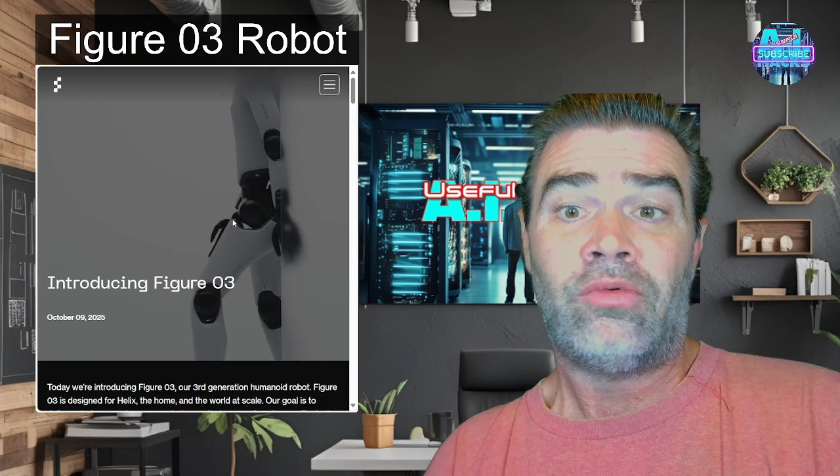From dishes, kitchens, factories, this robot isn't just a machine, it's a partner designed to free your time, transform your day, and redefine what it means to be a human in an AI-driven future. A brand new Figure 3 robot enhances your life.

It features feather-light hands and tactile sensors, along with palm-mounted cameras, allowing it to manipulate anything from towels to delicate glassware with human-like skill. Its battery, safety features, and wireless charging make it ideal for home use, and it was just tested in Northern California.

While its AI-driven system, Helix, gives it the ability to learn and act with real reasoning power. Engineered for mass deployment, with production lines ready to bring humanoid robots to everyday environments, from homes to supermarkets and manufacturing floors.

Robots like Figure 3, Tesla's Optimus, and Boston Dynamics Atlas are helping solve labor shortages, automate industrial tasks, and make dangerous jobs much safer for humans. You see, real-world tasks, with each upgrade of the Figure 3, it moves closer into being a true general-purpose robot.

It can fold clothes, load dishes, and even respond to spoken commands thanks to the powerful AI models. Imagine a trusted assistant at home, ready to help with your chores, giving families the precious time to spend with their loved ones.

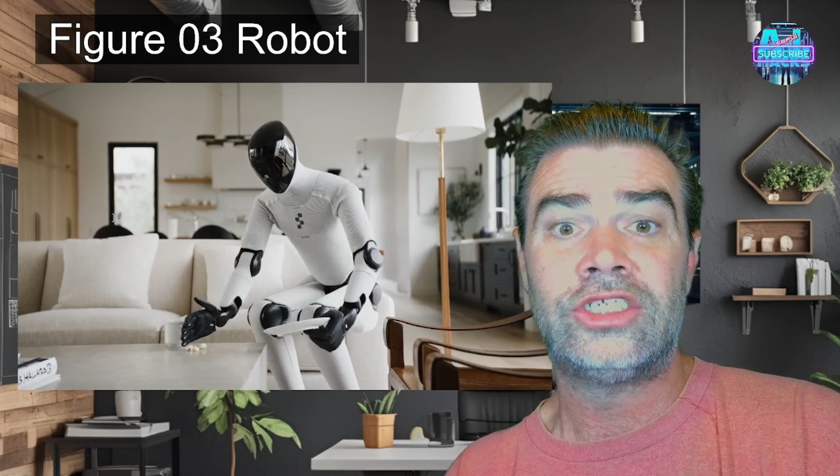The broad impact and the ethics that have to do with this, as robots take on critical roles in healthcare, construction, and logistics, we must also consider ethical deployment. In fact, that's going to be our next story coming right up.

But the workforce, it's transitioning, and the promise of greater human-robot collaboration is right on point, with the market aiming for millions of humanoid robots in less than 10 years by the year 2035. The world is entering a new age of productivity and inclusivity.

You see, the thing is this Figure 3 robot, it isn't just a robot. It's proof that future AI helpers are here to stay. Imagine what you could do with more free time and a partner powered by cutting-edge technology, ready to help whenever you need it.

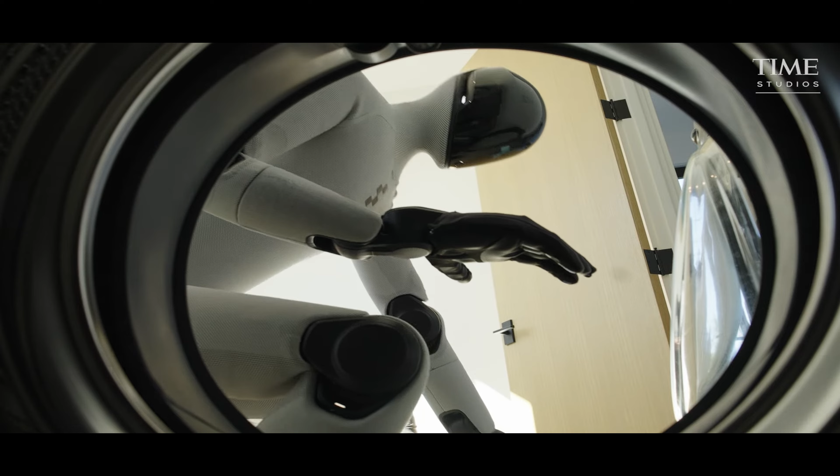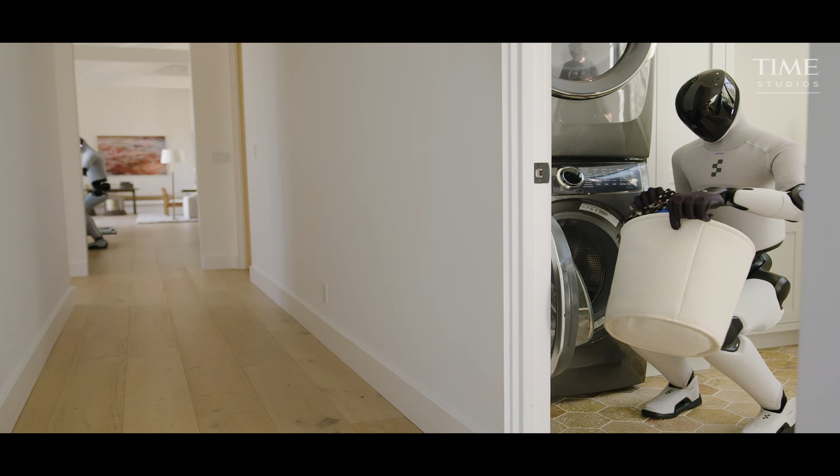General robotics, it seems, is still a long way from becoming a reality. So there were occasions where I was watching the robot folding towels and loading a washer. And it's kind of clear that it can do those things pretty well, but there were times when one of the towels dropped out of the washer and it was unable to pick it up.

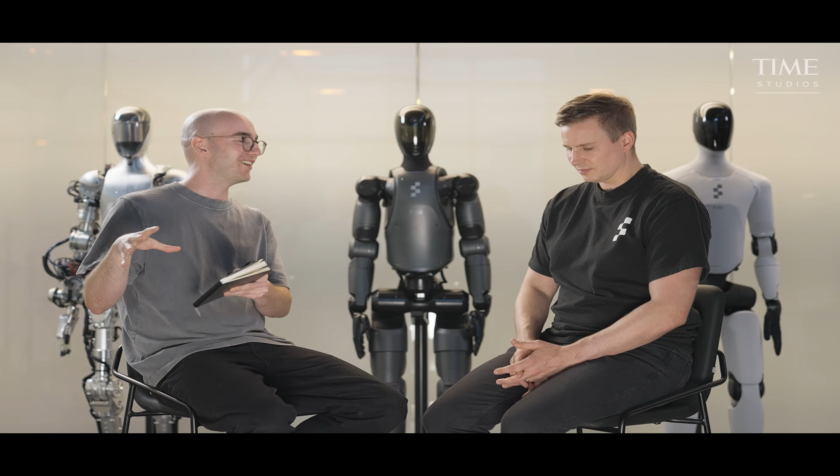So how do you get from there to your vision of a general robotic overlord that can do anything you want it to? Yeah, overlord, nice. I think the short answer is we feel like data fixes almost all this at this point. And we've seen that in almost all the demonstrations we do, where even in the early stages, we would say towel folding or the logistics use case, it just wasn't that great. It made a bunch of mistakes.

As we added more data, it got faster. It made fewer mistakes. Still had some mistakes there, and all that is asymptotically approaching zero. It's getting close to human levels in terms of we can run them for hours and hours, and it just performs really well.

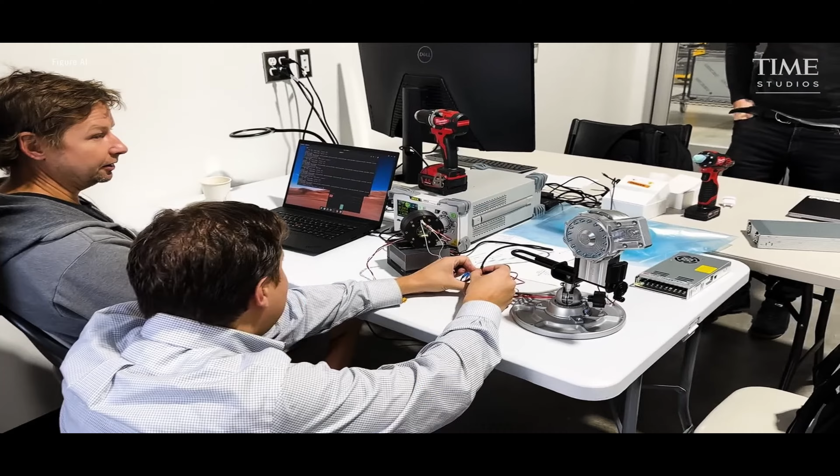Large language models, like ChatGPT, prove that if you scale up the amount of data and computing power used to train a neural network, it would gain surprising new capabilities across the board. Figure is one of a group of companies attempting to apply that insight to robotics.

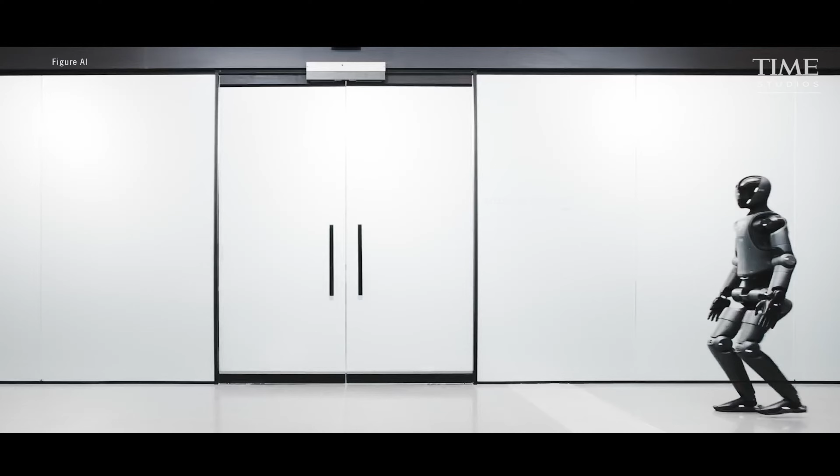The company is spending big to collect video data of humans performing tasks, like folding clothes and cleaning homes, in a bid to teach robots to do the same thing. The big question is, will it work? The company says early experiments have already yielded promising results.

Some of the last generation of robot, the Figure 2, are already working in a BMW factory in South Carolina, moving parts that ultimately make it into the BMW X3.

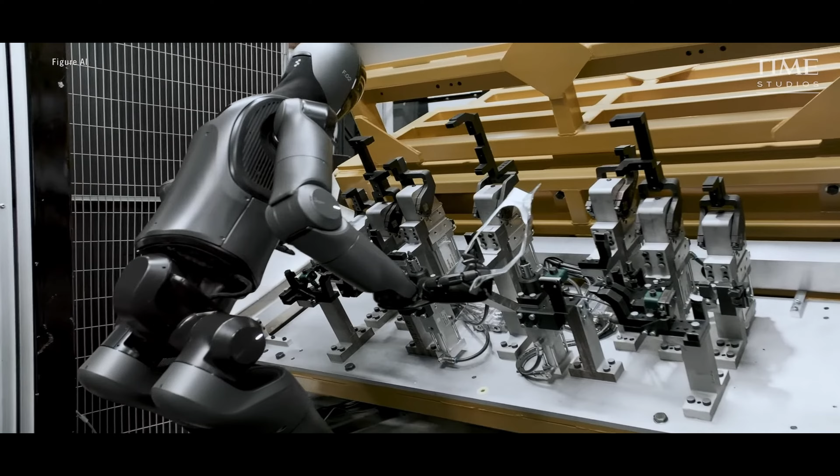One of our core focuses in the roadmap here is how do we ship robots into basically every consumer home in the world. We want to do what we do all day in the home, just things I hate. I don't want to do laundry, I don't want to do dishes, I don't want to clean up the house. And we haven't really had any large breakthroughs in the home in terms of automation for decades.

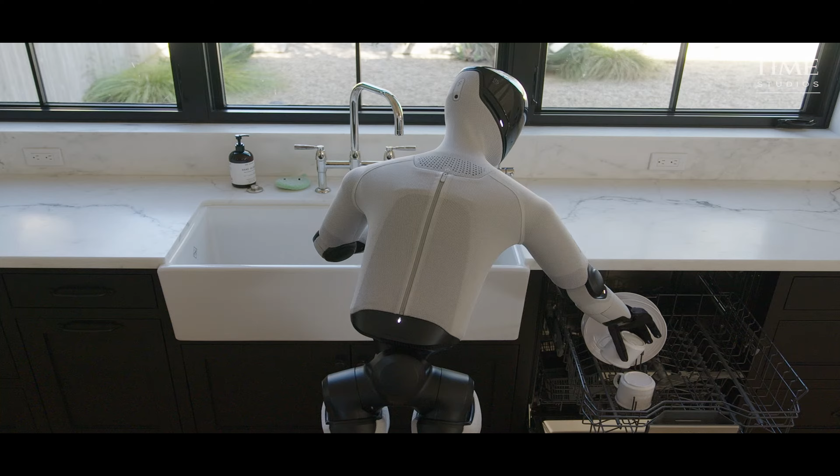So our view is that the robot will not only act as your companion in your home, being able to share very deep memory and basically talk to you just with speech, and then ultimately be able to do everything you do in the home that you don't want to do.

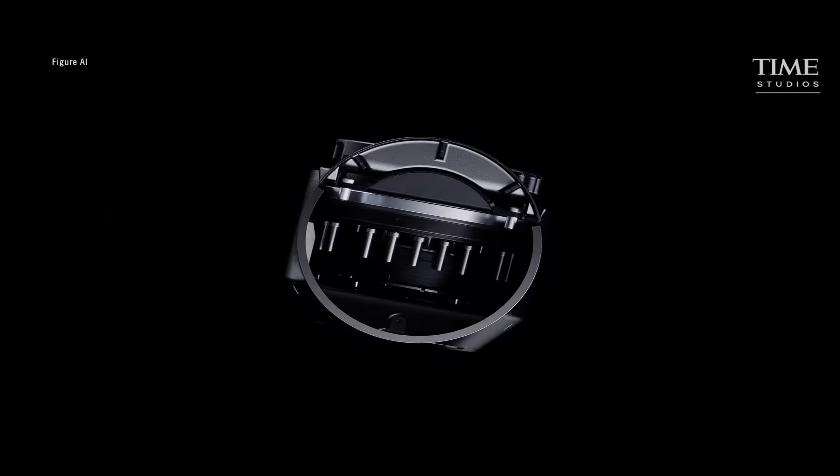But upon its launch this October, the Figure 3 won't be ready for your home. Not only is the robot not yet useful enough to be an Android butler, but Figure says it also has many unsolved safety challenges. Large language models are notorious for sometimes going off the rails, and that controllability problem will extend to the systems that power humanoid robots too. There's also the problem of ensuring that the robot doesn't fall over, cause property damage, or injure its human cohabitants.

Getting the robot to be extremely safe in the home long term is a really hard problem. I would say now we're tracking almost 15 different areas for safety. There's a physical safety thing, the system safety engineering needs to be done really well. There's cybersecurity that we need to do really well. How do we do encryption at scale?

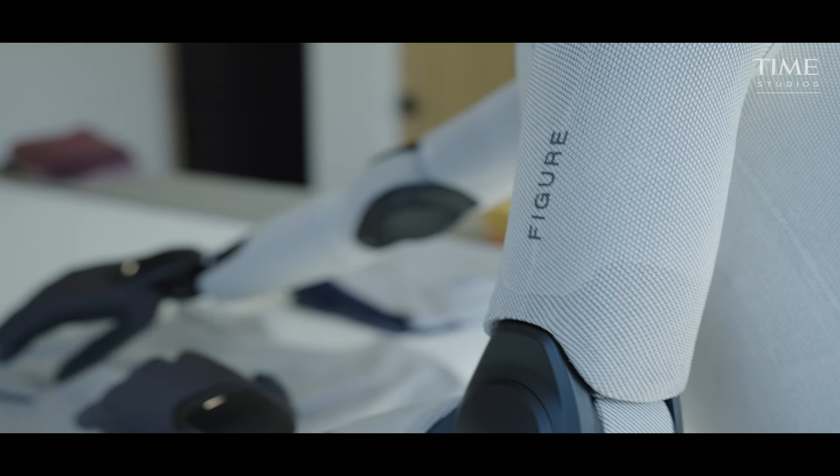We have a safety lead here that previously worked on mobile robotics. We have a cybersecurity lead that came from one of the top groups in cybersecurity here in the US. They each have teams, and we're trying to spend a large focus on figuring out how do we enter first, which will be US homes, and then global, in a safe way, and do high performance work.

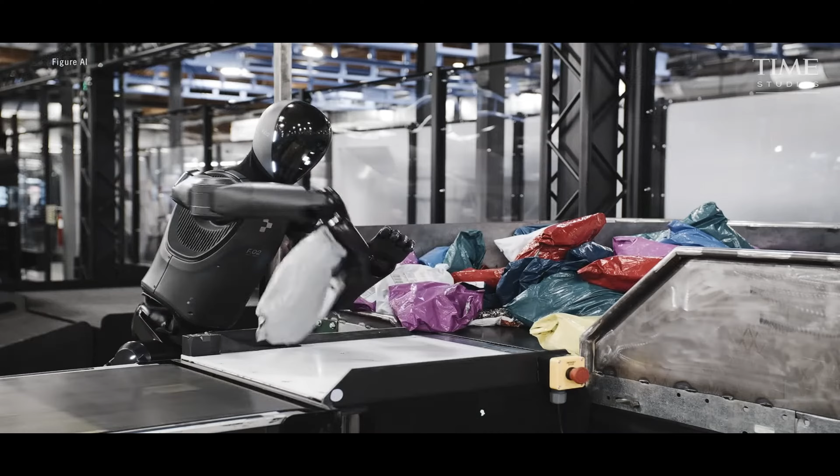If there's even a small chance that this audacious company can succeed in its goal, the implications would be world-changing. With the global population expected to peak this century before heading into decline, the arrival of robots might allow the world economy to continue growing, even as human labour becomes less abundant. Thanks to robots, the cost of goods and services might plummet, potentially enabling an increased quality of life for all.

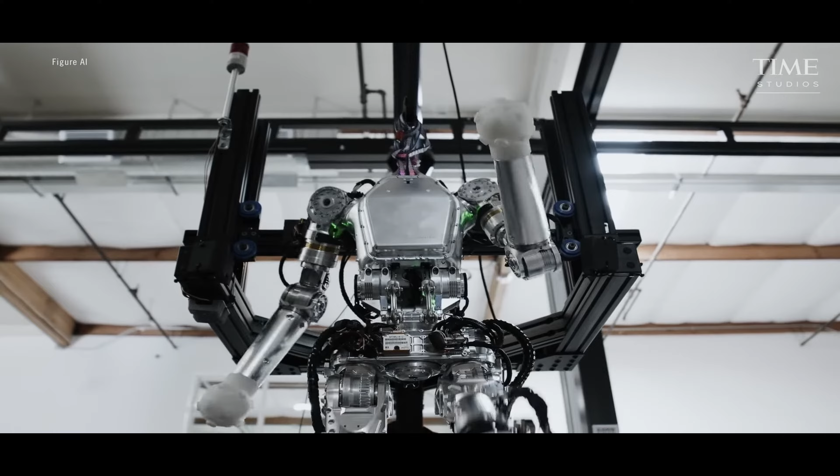But liberating humans from work would also mean liberating them from their paychecks. Robots would do the same for manual labour as cloud-based AI threatens to do for office work, creating a joblessness crisis that Adcock says should be addressed with some form of universal basic income. At the same time, though, this billionaire entrepreneur is already calculating how to win control of what he expects to be a $40 trillion industry, and one that tends towards monopoly.

You're making a synthetic human. Right. That's really cheap. It works 7 days a week, 20 to 24 hours a day, and just wants to keep working and learning. How many cheap humans, synthetic humans, could you sell in the world to do stuff? I mean, I think billions in the workforce for sure. I think every human would want one, so you have close to 10 billion there.

I do feel there'll be a point, probably in the Bay Area first, where you walk out and you see more humanoids than humans. Yeah, it's gonna be here, right? And that'll feel crazy. I grew up reading a bunch of crazy sci-fi and dreaming of this, but I think it'll be amazing to have humanoids out and about, and you can talk to it like a human. It can basically do things for you. It's a companion, knows you better than maybe anybody else. So I'm really looking forward to it.

We're not designing the robots to harm humans or weaponize things like this. We're designing them to do really useful work for humanity.

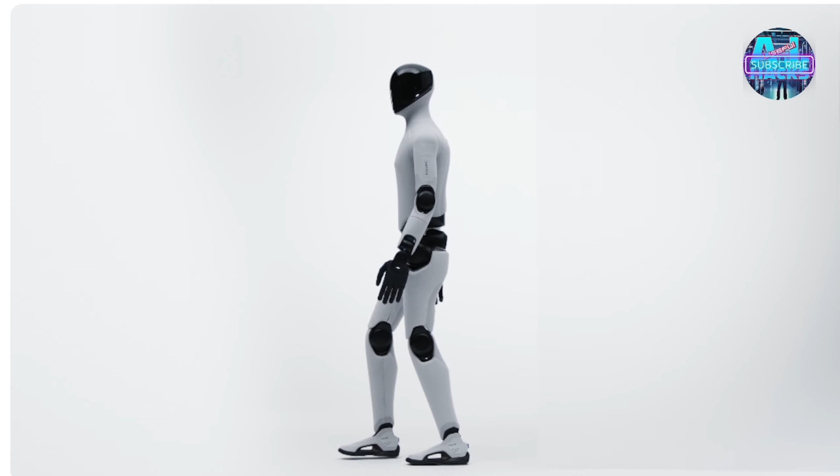So, as you can see, they just introduced Figure 3 today, October 9th, 2025. They say: today we're introducing Figure 3, our third generation humanoid robot. Figure 3 is designed for Helix, the home, and the world at scale. Our goal is to deliver a truly general purpose robot, one that can perform human-like tasks and learn directly from people.

To realize this vision, our engineering and design teams completed a ground-up hardware and software redesign to ship Figure 3. For Helix, Figure 3 features a completely redesigned sensory suite and hand system which is purpose-built to enable Helix, Figure's proprietary vision language action AI. For the home, Figure 3 has several new features, including soft goods, wireless charging, improved audio system for voice reasoning, and battery safety enhancements that make it safer and easier to use in a home environment.

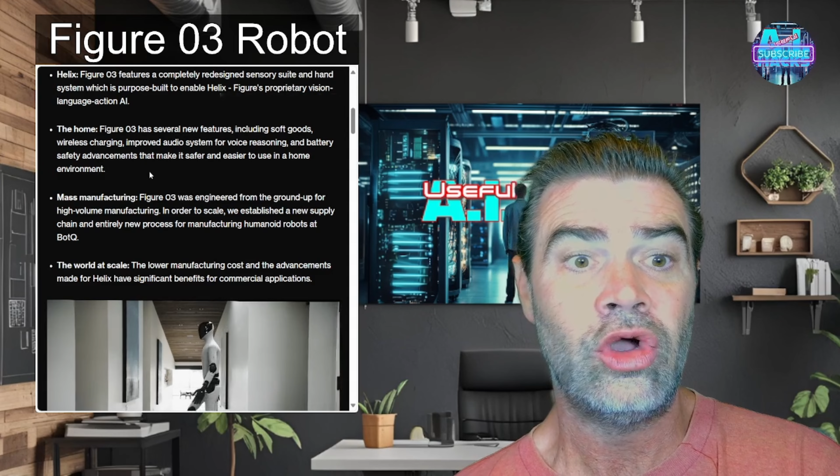For mass manufacturing, the Figure 3 was engineered from the ground up for high volume manufacturing. In order to scale, they established a new supply chain, an entirely new process for manufacturing humanoid robots at BotQ. The lower manufacturing cost and the advancements made for Helix have significant benefits and ready for commercial applications. Here they are testing it in Northern California.

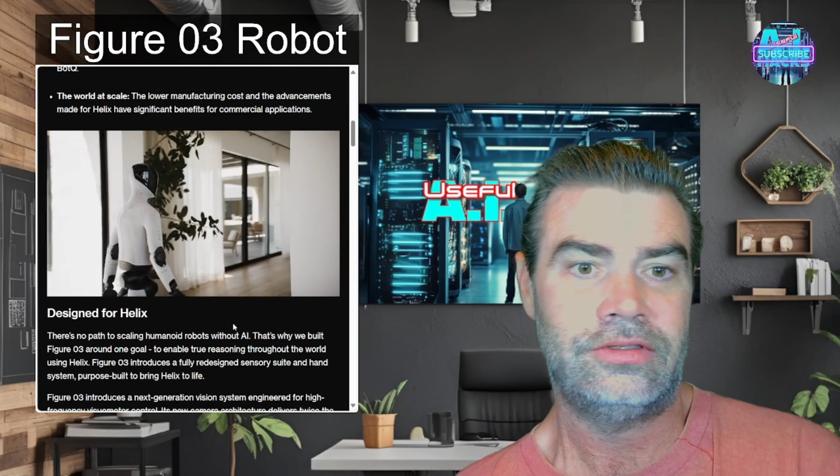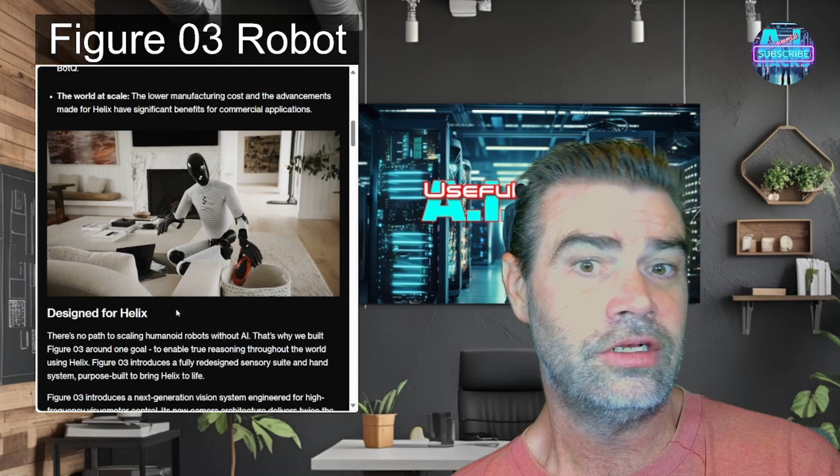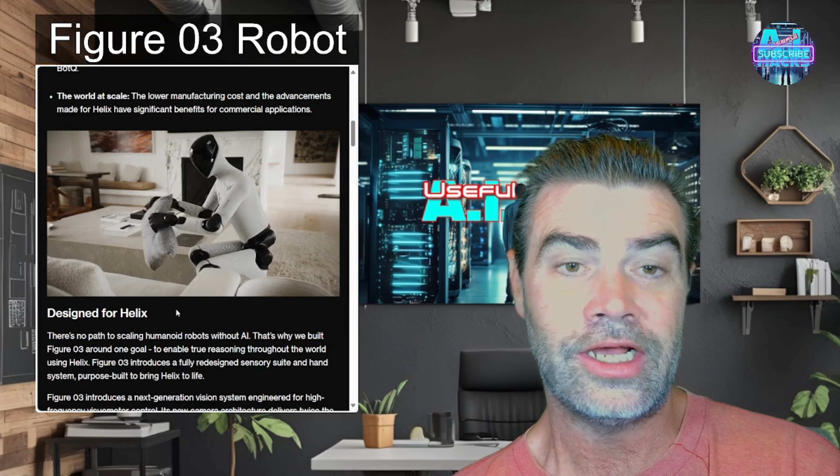Look at that. It walks just like normal. Can you imagine? You might have one of those in your household in the next few years. Prices on all this are going to come down. And, hey, are you going to have to ask your kids to put away their toys? Or maybe you might want the Helix to help you with putting away your computer systems or setting it up for you so you can start doing your work, cleaning house, you name it. It's going to be saving time so that you can spend time with your loved ones and friends and family.

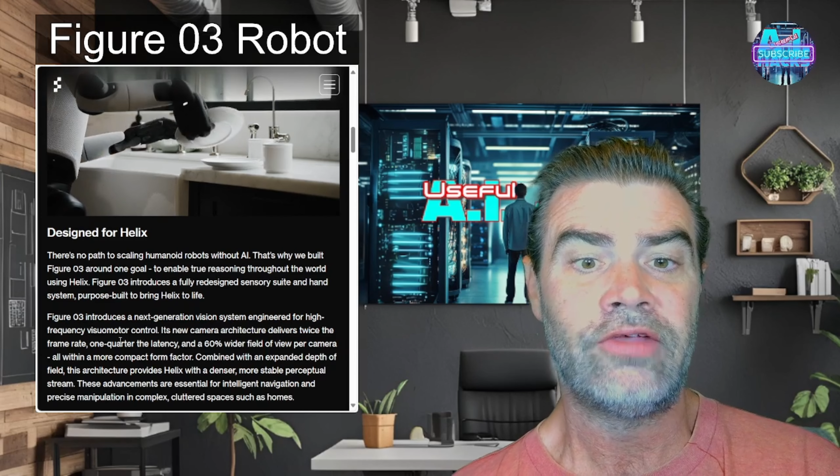There's no path to scaling humanoid robots without AI. That's why they built Figure 3 around one goal: to enable true reasoning throughout the world using Helix. Figure 3 introduces a fully redesigned sensory suite and hand system purpose-built to bring Helix to life. Figure 3 introduces the next generation vision system engineered for high-frequency visuomotor control. Its new camera architecture delivers twice the frame rate, 1/4 of the latency, and 60% wider field of view per camera, all within a more compact form factor.

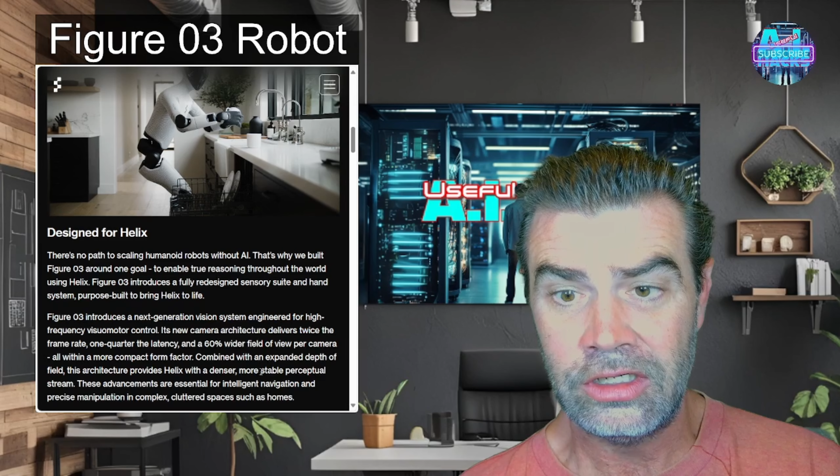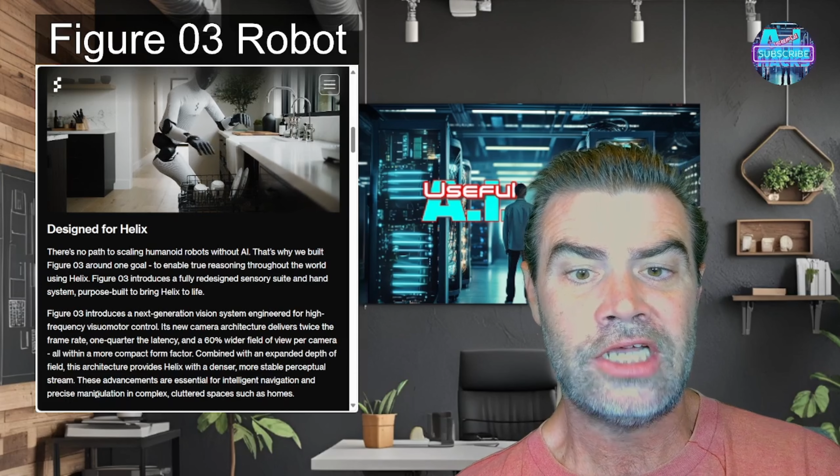Combined with an expanded depth of field, this architecture provides Helix with a deeper, denser, more stable perceptual stream. These advancements are essential for integrating intelligent navigation and precise manipulation in complex, cluttered spaces such as homes. Tired of doing laundry? Have the Helix do it for you.

Each hand now integrates an embedded palm camera with a wide field of view and low latency sensing, which offers redundant, close-range visual feedback during grasps. These cameras allow Helix to maintain visual awareness even when the main cameras are occluded. As an example, when reaching out into a cabinet or working in a confined space, it enables continuous adaptive control in real time. So you don't have to fold your laundry anymore. Have the Helix do it for you.

Figure 3 hands represent a major leap in compliant and tactile design. Softer, more adaptive fingertips increase surface contact area, enabling more stable grasps across objects of varied shapes and sizes. After surveying existing market options, Figure found that current tactile sensors had inherent limitations that could not withstand real-world use. This led them to an internal development process of their first-generation tactile sensor, guided by 3 principles: extreme durability, long-term reliability, and high-fidelity sensing. Each finger sensor can detect forces as small as 3 grams of pressure, sensitive enough to register the weight of a paper clip resting on your finger.

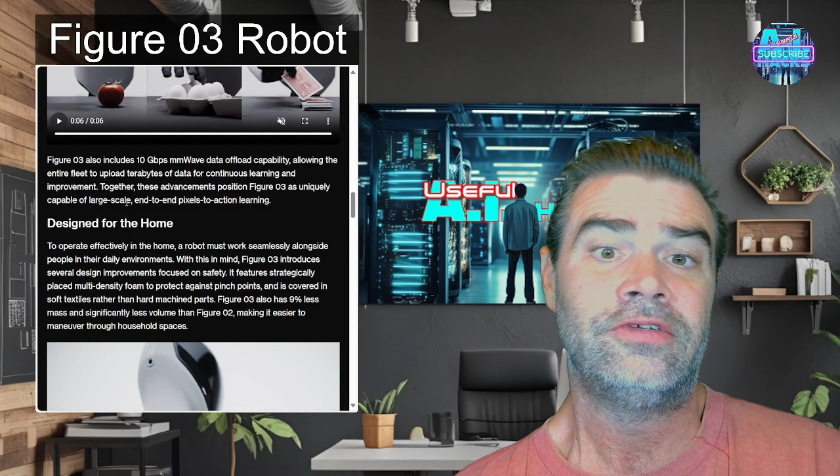Figure 3 also includes 10 gigabits per second mmWave data offloading capacity, allowing the entire fleet to upload terabytes of data for continuous learning and improvement. Together, these advancements position Figure 3 as uniquely capable of large-scale end-to-end pixel-to-action learning. Designed for the home: to operate effectively in the home, robots must work seamlessly alongside people in their daily environments. With this in mind, Figure 3 introduces several design improvements focused on safety.

It features strategically placed multi-density foam to protect against pinch points, and is covered in soft textiles, rather than hard machined parts. Figure 3 also has 9% less mass and significantly less volume than Figure 2, making it easier to maneuver through household spaces. The Figure 3 battery pushes the bounds for robot battery safety and incorporates multiple layers of protection against abuse and malfunction, introducing safeguards at the battery management system, cell, interconnect, and pack levels. The battery has already achieved certification to the UN 38.3 standard.

Beyond safety, Figure 3 is designed for everyday usability. The soft goods are fully washable and can be removed and replaced without tools, allowing quick and easy swaps. The robot can also be customized with various clothing options, including garments made from cut-resistant and durable materials.

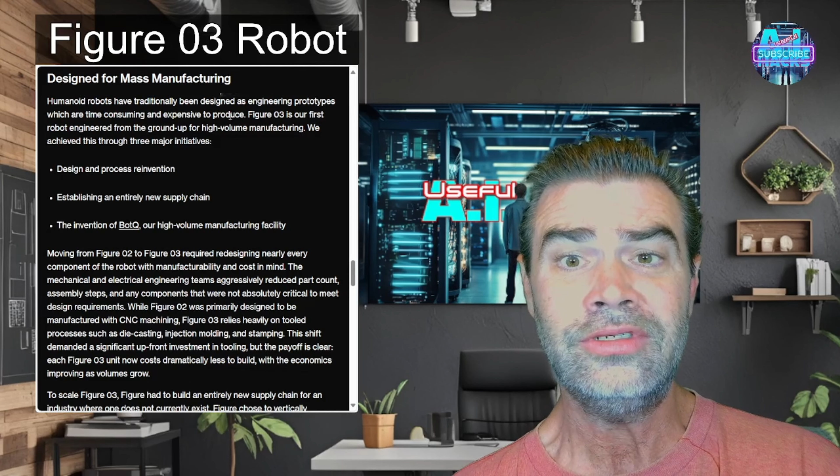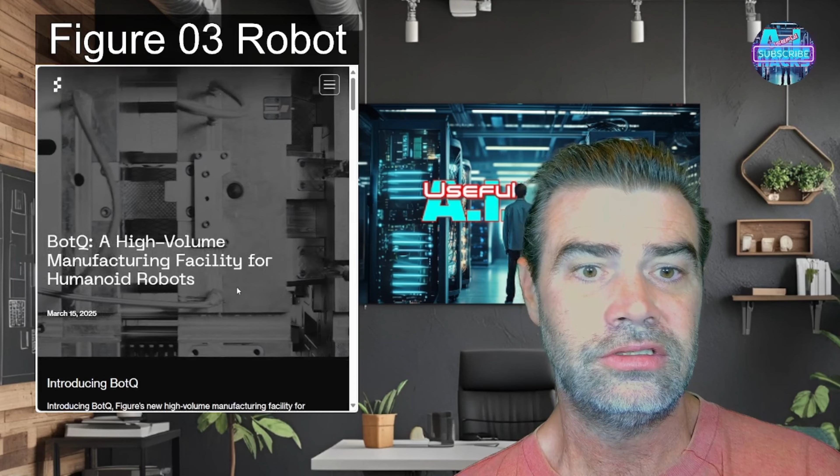They've achieved this through 3 major initiatives: design and process reinvention, establishing an entirely new supply chain, and the invention of BotQ, their high volume manufacturing facility. And this is BotQ right here. Introducing BotQ, Figure's new high-volume manufacturing facility for humanoid robots.

BotQ's first-generation manufacturing line will be capable of manufacturing up to 12,000 humanoid robots per year. This is just the start, as they are going to scale up considerably from there.

Over the past 8 months, Figure's hardware and manufacturing engineering teams have been building an efficient and scalable manufacturing process from the ground up, and they're excited to share it today. It just launched. They featured vertically integrated manufacturing, where Figure has made the decision to bring the manufacturing of their humanoid robots in-house to control the build process, quality, and guarantee that they will be delivering high-functioning robots to the market.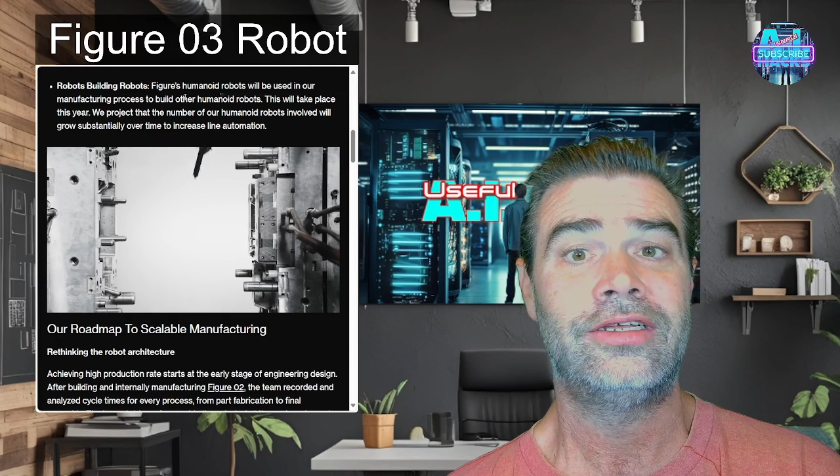They also build software infrastructure. Over the last 6 months, they've been building the underlying software infrastructure that supports high-volume manufacturing and building robots. And that's right, you think humans are doing it anymore? No. Figure's humanoid robots will be used in their manufacturing process to build other humanoid robots. This will take place this year. They project the number of humanoid robots involved will grow substantially over time and increase the automation.

Their roadmap to scalable manufacturing is basically rethinking robot architecture. Achieving high production rate starts at an early stage of engineering design. After building the internally manufactured Figure 2, the team recorded and analyzed cycle times for every process, from part fabrication to final assembly. The largest driver of the assembly time started at the root.

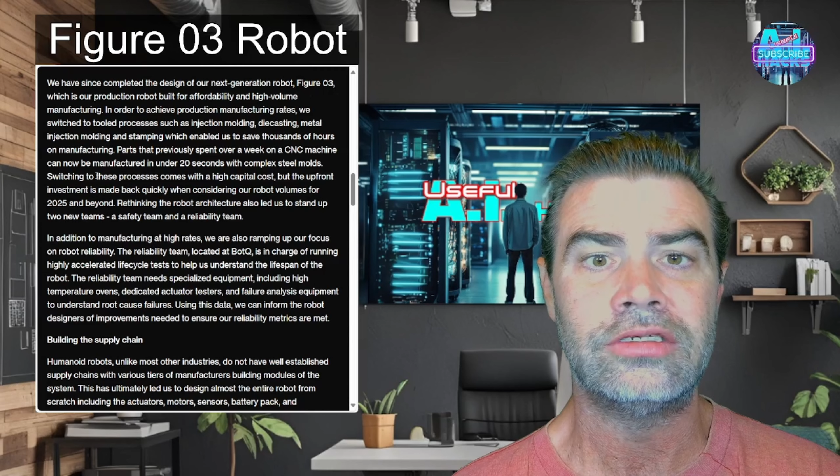In addition to manufacturing at high rates, Figure is revamping their focus on robot reliability. The reliability team, located at BotQ, needs specialized equipment, including high temperature ovens, dedicated actuator testers, and failure analysis equipment to understand root cause of failures. Using this data, Figure can inform the robot designer to ensure reliability metrics are met.

They essentially have their supply chain easy to scale to 100,000 robots, or even 3 million actuators, within the next 4 years. One key aspect to producing products like this is basically understanding which operations in the production line should be automated and which should be manual. Historically, humanoid robots have been built in a low volume and manual way.

Figure has chosen key elements to automate in the short term by looking at metrics such as quality and speed. For example, an automation of quality is the automated grease dispense station for their motor gearboxes, which controls the location and volume of the gearbox grease.

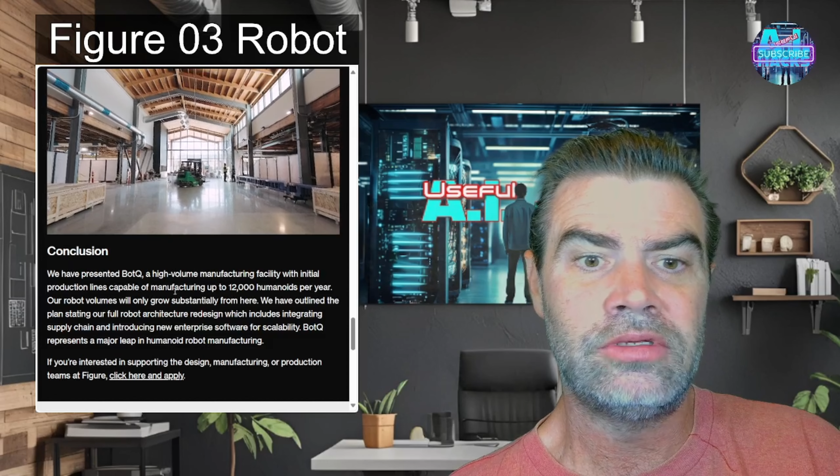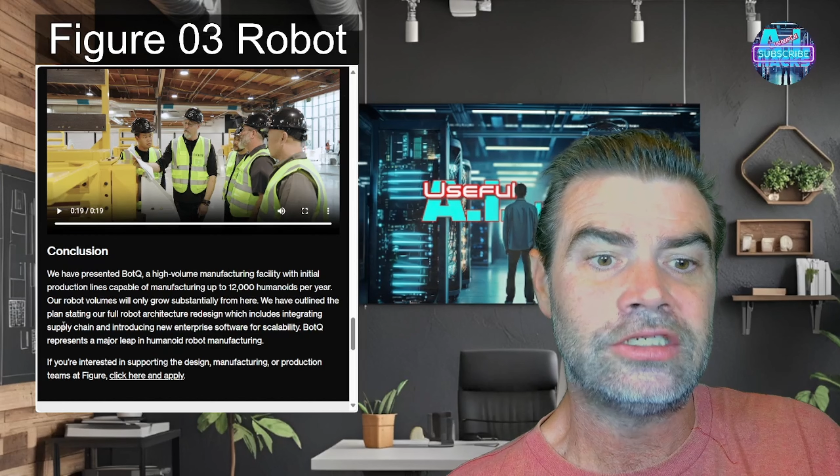Figure has presented BotQ, a high volume manufacturing facility, with initial production lines capable of manufacturing up to 12,000 humanoid robots per year, and their robot volumes will only grow substantially from there. They've outlined a plan for a full robot architecture redesign, including integrating the supply chain and introducing new enterprise software for scalability.

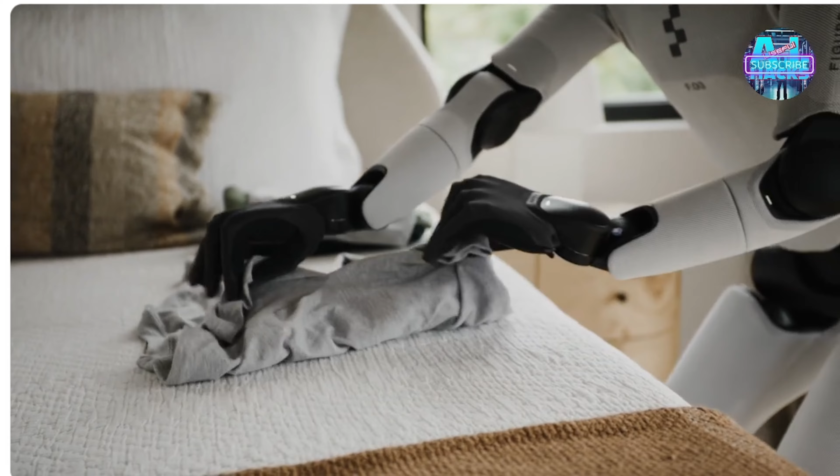Figure's focus on the home market is in no way a distraction from the potential of Figure 3 in the commercial market. By solving for variability and interactability in the home, Figure is developing a purely general purpose product that can do the widest possible range of tasks in the workforce.

Figure 3 is well suited for commercial applications for several reasons. The actuators can perform at 2 times faster speeds with improved torque density, and the most significant result of this is their ability to pick up and place items at a faster speed.

Check this out. That's just crazy. Look at that. Are you going to have your Amazon jobs for much longer?

Well, not if Figure 3 has something to do with it. Their improvements to their hands and sensory suite have made a major significance for commercial use applications for Helix. The camera and perception system upgrades mean Figure 3 will be able to intelligently navigate commercial environments and execute precise manipulation.